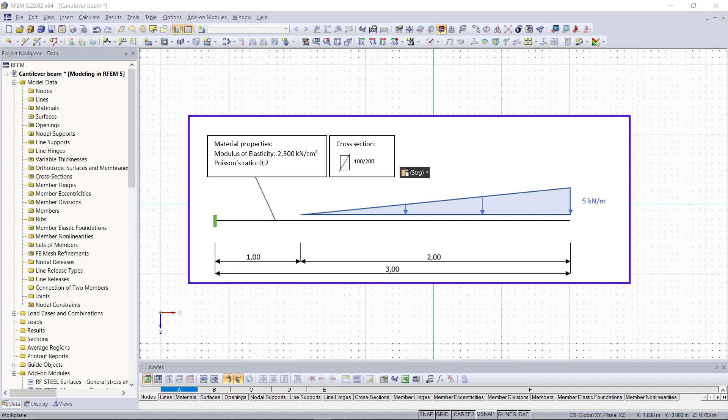As previously announced in the first tutorial, we are going to create this cantilever beam, this time using the dialog options in RFEM for modeling.

To begin with, we can access all dialogs in the project navigator on the left side of the screen by right-clicking on the respective tabs or folders, or using the insert menu up here. For instance, if we choose model data and select materials, you can see the option dialog box here. Within this tutorial, I am going to use mostly the project navigator for opening up these dialog boxes.

Again, we will start with the nodes of our beam element. We go to the nodes folder, and with a right click, we choose the option New Node. This new dialog appears, and just like in the first tutorial where we used tables for creating the nodes, we are going to enter the coordinates of our nodes depending on a reference node. This will be the origin, and we place the first node here, so the coordinates of this node will be 0 and 0.

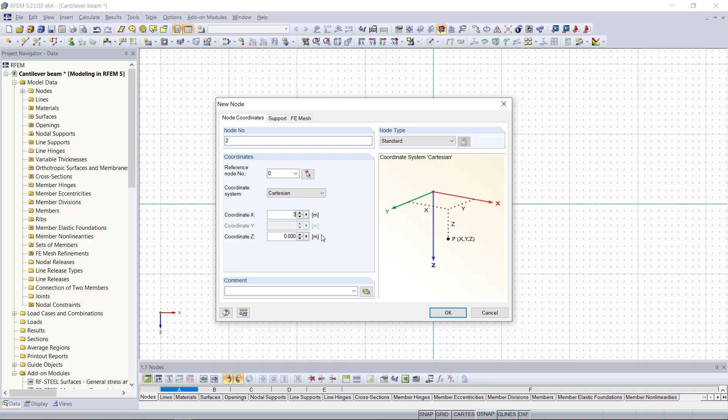Then we click OK, and we do exactly the same for the second node: right click on the Nodes tab and choose New Node. The coordinates for the second node we enter here as 3, which defines the endpoint or the length of the beam. Again we hit OK, and then we can see that the nodes are set in the graphical area.

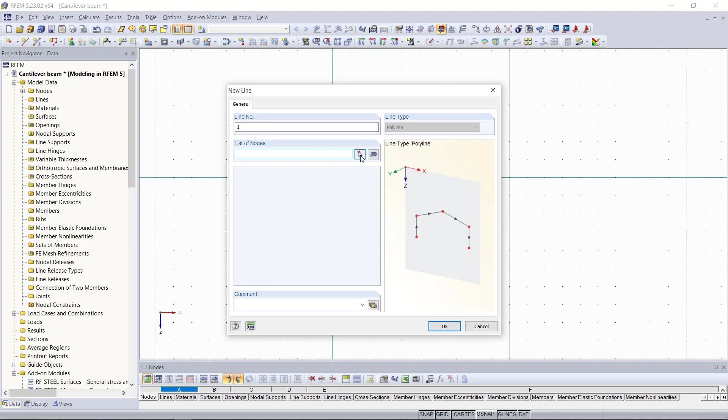So now to connect these nodes with the line in between, same procedure once again: with a right click on the Lines tab in the project navigator, we open the dialog box for a new polyline. At the top, we can define the number of the line; since we just have one line, this will be the first one. In the section below, we select the nodes to be connected, and we can either type in 1, 2 for our two nodes, or, if you have a more complex model and don't know the numbers of the nodes, there is also the option to select the nodes graphically by clicking the cursor button and selecting them out of the graphical area.

Next, we will continue with defining a material. Let's say, again just as an example, we enter material 1 like in the first tutorial. Then we will enter our characteristic values from that example. You will notice that after entering the modulus of elasticity and a Poisson's ratio, the shear modulus is automatically determined. We can close this by clicking OK.

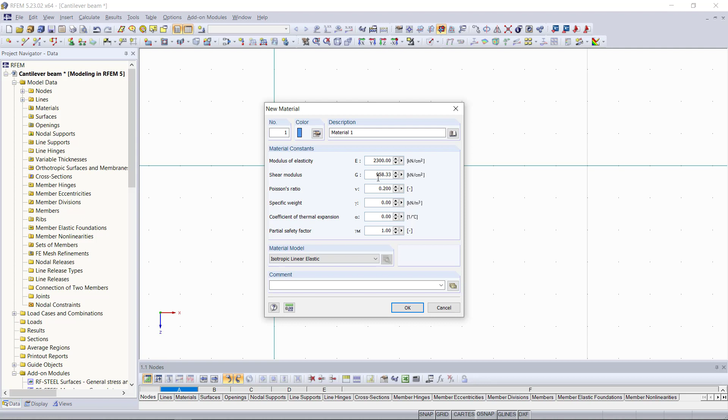Now we are going to set the supports, and once again we can find nodal supports in the project navigator, and with a right click we will open the dialog for that. A cantilever beam is one of the basic types of beam elements, and remember this type is characterized as a statically determinate system. For that we need 3 support forces or reactions as a minimum. Since this beam is supported at only one end, we have only one actual support here, which is going to be our first node, and at that support it has to have all of those reactions.

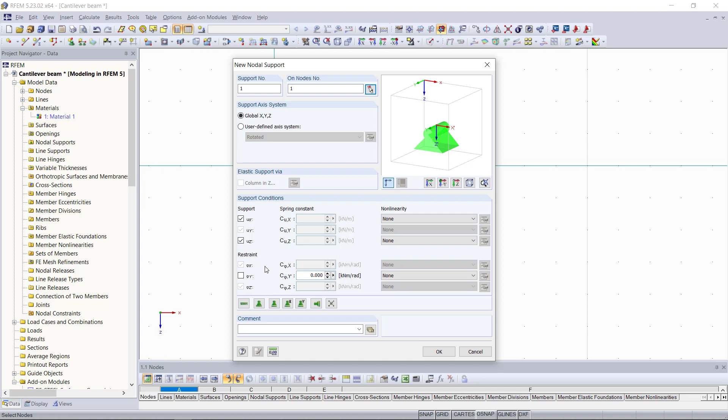For that, the support conditions here will restrain the beam horizontally and vertically. In case we don't have anything else, it would be allowed to rotate, and we don't want that, so we lock the rotation around the y-axis here. The graphic at the upper right corner gives you a nice visual illustration for that. Then we can click OK, and next we need a cross section for our beam element.

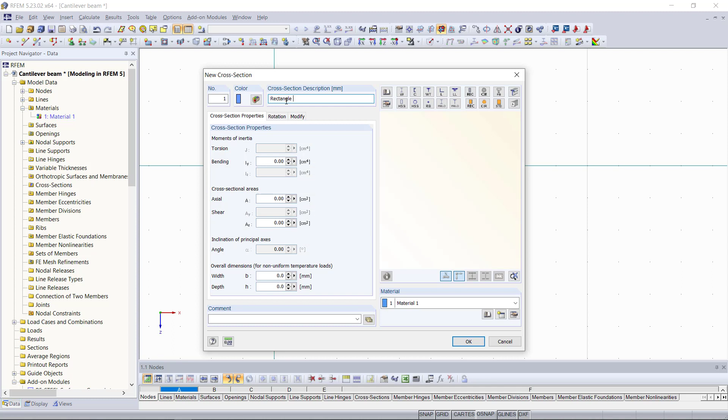In this dialog, we can either open up the library if we hit this symbol here, or we can just type in the cross section as well. Let's say we enter a rectangle, which will have a width of 100 and a height of 200, same as the one in our first tutorial. We can see below the cross-section properties, and down here we can choose the material for this cross-section, which will be our defined material 1.

Now that our cross-section is defined, you will notice that it's blue here in the project navigator. This is because it doesn't have a member assigned to it yet.

To assign it to a member, we go to the members folder, right-click, and select new member. Within this dialog, we can assign the member to a line, either typing in line 1 or assigning the line graphically.

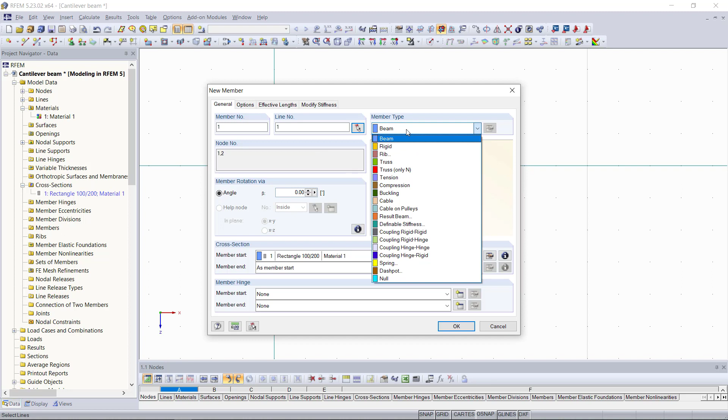Next, within this drop-down option, we select the member type. For now, we'll keep that as a beam. Below that, there's the option to rotate the cross-section. If we click here, we can see the rotation reflected in the graphic on the right side.

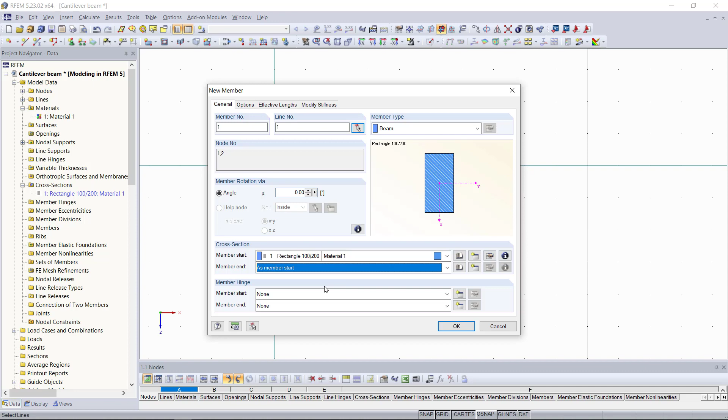Moving down, we can assign the cross-section for this member, keeping it the same for the member start and end. We can also add member hinges, but we don't need that for this example. We click OK, and if we turn off the wireframe model, you can see in the graphical area that the cross-section has been rendered.

Now that we have all the model data we need, we can move on to the load cases and the loads we'd like to apply. Remember, before assigning any loads, we'll have to define a load case.

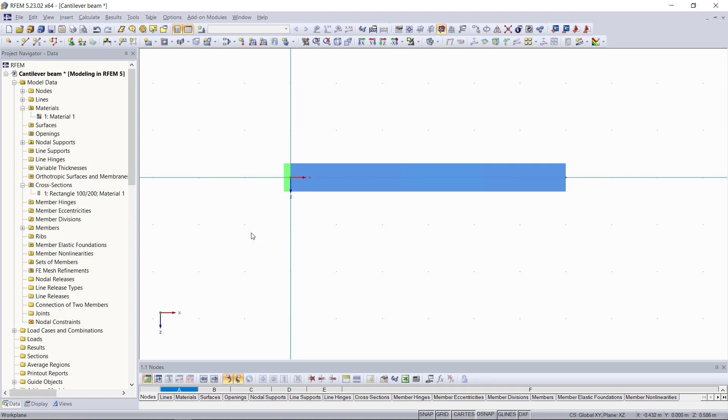We do this by going to the load cases and combinations folder in the project navigator. Right-clicking on load cases, we choose new load case, and the program has already created our first load case. In this tutorial we'll have only one load case, so we keep that and choose all loads here. Then we deactivate self-weight because we don't want that taken into account for the results later.

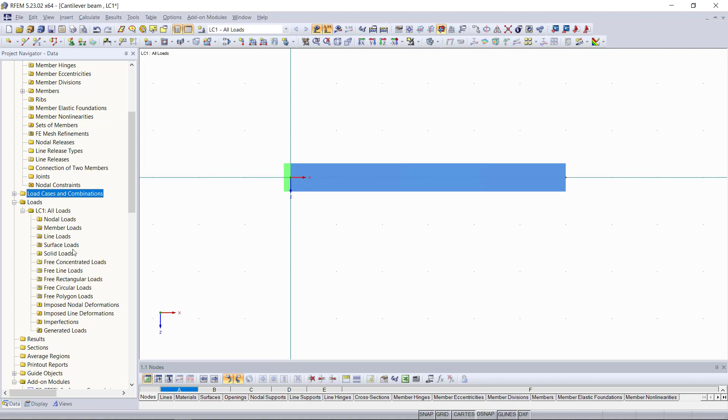Next, we continue with the member load. If we expand the loads tab in the project navigator, you'll find a new folder for every load case you've created. Since we just have one load case, we expand this one, and you can see options for different loads like nodal loads or surface loads. We'll choose a member load and open up the dialog for that.

The load type here we'll keep as force, and for the load direction we keep that as the global member length in the Z direction.

For this example, we are going to apply a triangular load, using a load distribution of trapezoidal. We can see on the right side how this load is applied on our member, starting with load P1 and ending with load P2. We find these parameters down here in the load parameters section.

Since we want a triangular load distribution, we keep P1 as 0, and enter 5 kilonewtons per meter for P2.

For this example, we don't want the load applied over the entire member length. To do this, there's an option down here we can turn off, which lets us set where our load will be on the member. The start point will be point A, which we type in as 1.5, and end point B will be 3.

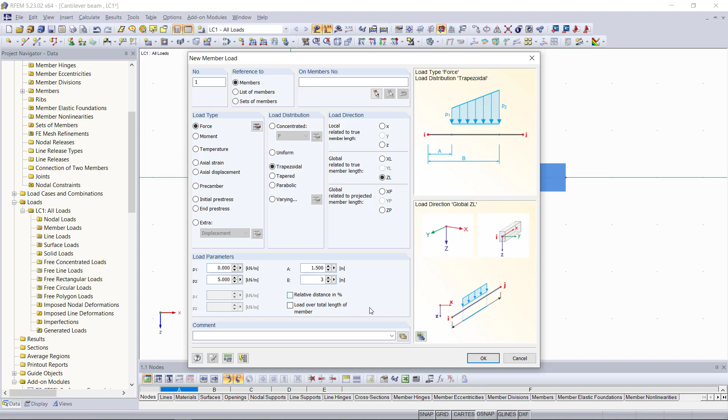We then choose the member graphically and click OK once again. Now the load is applied to our cantilever beam, as you can see in the graphical area.

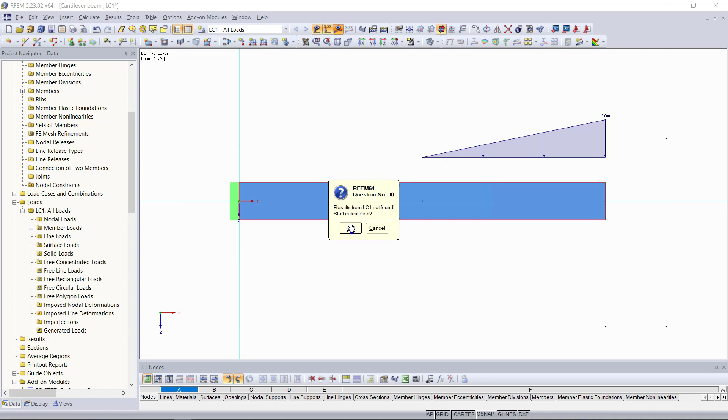To show the results for this load case, we go up to the button called show results, then click OK. Now you can see our results are displayed, and the results tab has come up where we can choose to display the deformations of this beam or the internal forces.

So guys, I hope this video was helpful to show you how to model using the dialog options in RFEM.